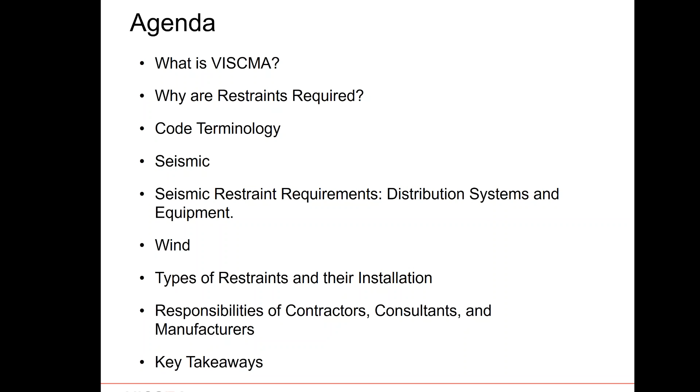So VISCMA is a collection of partners and companies to form the Vibration Isolation and Seismic Control Manufacturers Association. We were incorporated in 1999, and we're experts in the field of seismic restraint, wind restraint, vibration isolation, and noise isolation. Our purpose is to work together as a collective of professionals with a lot of knowledge and a lot of experience and expertise to be able to provide resources, interpretations, and standards, as well as best practices for the design professionals, installing contractors, and code officials in our industry, to be able to maneuver through the different documents that are necessary to understand what needs to be done for a building when it comes to vibration isolation and seismic restraints.

So to kick off our agenda today, we'll take a look at when are these restraints required. We've had a lot of communication with contractors, code officials, and specifying engineers to say, okay, I have a building, sometimes it requires seismic, sometimes it doesn't. Just to start off, we need to be speaking the same language. What are we talking about?

When we talk about restraint, we're talking about the restraints of non-structural components. In our industry, generally, these are mechanical and electrical equipment and distribution systems, usually within the HVAC world. And what we're trying to do is restrain them against forces caused by extreme events, not just earthquakes, but also winds, bomb blasts, and different things that can happen to want to move these pieces of equipment.

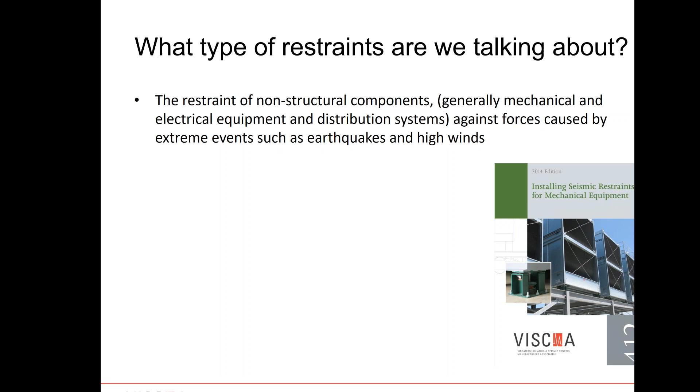The main purpose that we do this is for life safety. In different buildings, you have these pieces of equipment, and you want to make sure that they're operable during and after an event for life safety purposes. You also don't want these heavy pieces of equipment or these heavy systems falling on people, creating bodily harm.

So we have a few different codes and references that we work with. The main is the International Building Code, also known as the IBC, which references the American Society of Civil Engineers, number 7, that is updated, and the number afterwards, 02, 05, 10, is the year that it is updated.

You have government reasons, like the UFC, which is the Unified Facilities Criteria that's used for government buildings as well as military buildings, for mission-critical components, for anti-terrorism and Department of Defense. And then the last reason is due to the owner's request. Sometimes for insurance purposes, to be able to get a certain level of insurance, or to be able to protect very important data. A lot of restraints are put into data centers, for example.

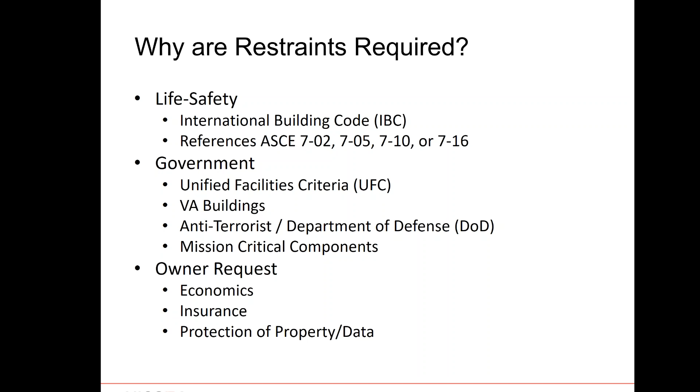Okay, let's talk a little bit about code references. So there's the code, there are standards, and then there are guidelines. An example of the code would be the International Building Code, or IBC. An example of a standard would be the American Society of Civil Engineers, or other standards that are available. And then guidelines or interpretations would be something similar to the VISCMA 412 manual that shows how to correctly install seismic restraints for mechanical components.

Translated, the IBC in the code really signifies the requirements. The standard tells you how to do it and provides you with the formulas necessary that you have to go through. And then these are always up to interpretation. And the guidelines serve as a good interpretation for the people that have to do the work on how it should be done.

A different slice or a different way to look at this is that there's a legal requirement and a non-legal requirement. The legal requirement is the code that becomes part of the building code, and then the standards that are also referenced by that code. The non-legal aspect are the standards that exist that are not referenced in the code itself, or the guidelines and the commentary that come with it. And again, an example for you to see would be the VISCMA 412 manual.

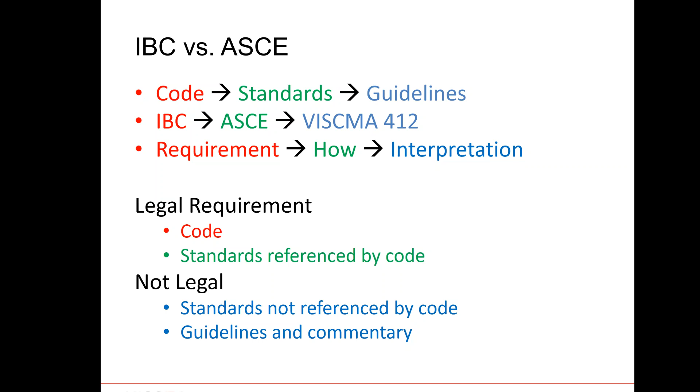Since 2003, the IBC has been referencing the ASCE, American Society of Civil Engineers, for the minimum design loads for seismic and wind. IBC is updated every 3 years. It was the amalgamation of different building codes from across the United States to create the International Building Code. And every 3 years it's updated. It's adopted by different municipalities and jurisdictions at different times. We still have people that are on IBC 2009, and we will have early adopters of IBC 2018 in early days of 2018. And there can be local amendments for each of these municipalities.

The ASCE document is updated as needed. It was updated in 2005, 2010, and 2016. And you can see that each IBC code references an ASCE 7. So in 2018, when your jurisdiction adopts that code, it will reference the newly updated ASCE 7-16. These are the critical documents necessary to have an understanding of what the requirements are for any new construction or retrofit construction in your area.

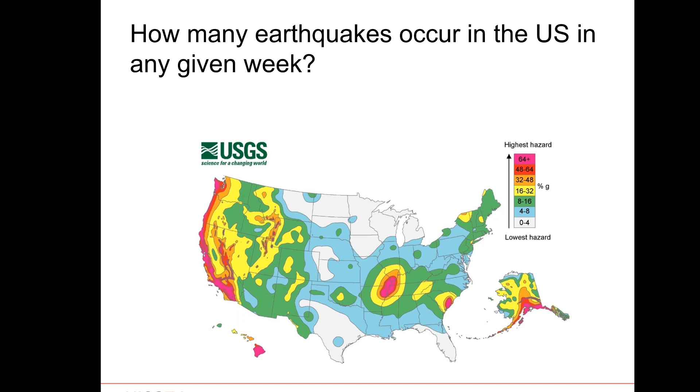Let's talk a little bit about seismic, and we'll start with a little bit of trivia. We've taken some information from the USGS website, and we've taken an average week. So if you were to think to yourself, how many earthquakes occur in the United States in any given week? I'll give you a little bit of time to think about this and come up with an answer. We ask this question when we do these presentations for different influencers. Usually the answer is 5 or 10, or maybe some people would guess that there's 20 or 30 in a given week. The answer for any average week is over 1,200 earthquakes.

And then you can see here on a map of the United States, there's a lot located in Alaska, California, up the West Coast, but it isn't only limited to those areas. You can see that in Montana and Idaho, Oklahoma, Tennessee, and usually in a given week, Hawaii, South and North Carolina would have some seismic activity as well. So this is not just something that applies only to the West Coast.

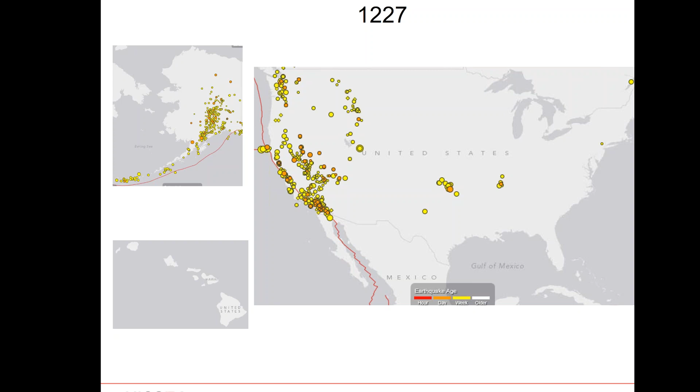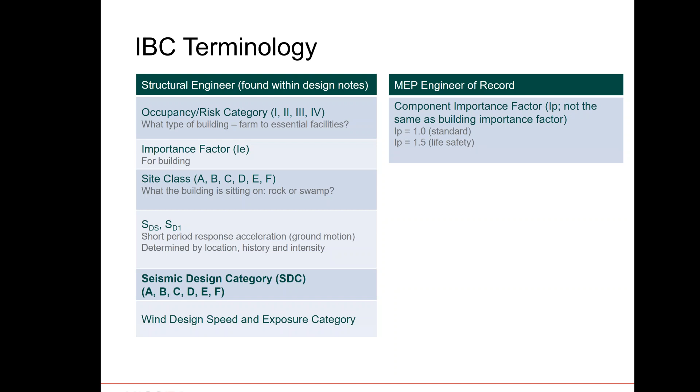So when we take a look at the seismic design category that goes from A to F, for buildings that are classified as A or B, there's no seismic design requirements for non-structural components. There are absolutely requirements for the building itself, but when it comes to restraining non-structural components, there's nothing that we need to be worried about. For buildings that have a seismic design category of C, only the systems with an I sub P of 1.5, which we will show you how to determine in a moment, require restraints. And then there are exceptions.

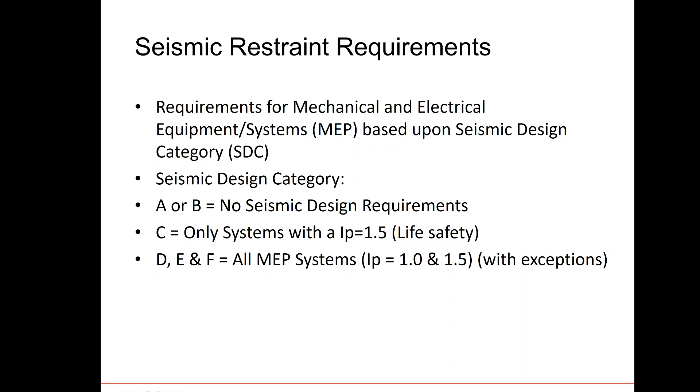For buildings that are D, E, or F, usually you'll only see C or D. E or F are more of the extreme. But for buildings that are D, E, or F, all of the MEP systems, both 1.0 and 1.5, will require restraints. However, there are some exceptions and some exemptions from this that we will cover.

Here, what we have done is we've referenced the ASCE 7-10, since that's the most commonly used version of the ASCE currently, Chapter 13, Section 13.1.3, showing MEP engineers of record how to determine the component importance factor for different pieces of equipment and different systems. And here are the 4 categories that make the I sub P 1.5. By making the I sub P 1.5, there's more likelihood that that piece of equipment will need to be restrained.

So I'll cover a couple of these. The component is required to function for life safety purposes after an earthquake, including fire protection sprinkler systems and egress stairways. Or the component conveys, supports, or otherwise contains toxic or highly toxic or explosive substances. So you get the picture, and if you reference the ASCE 7-10, Chapter 13, you will find these requirements of where you should classify a component as 1.5 versus 1.0.

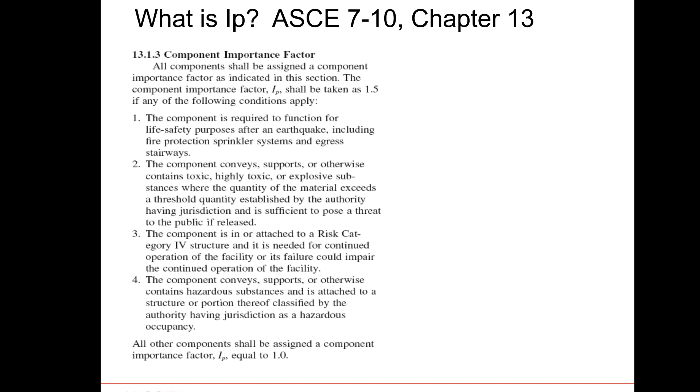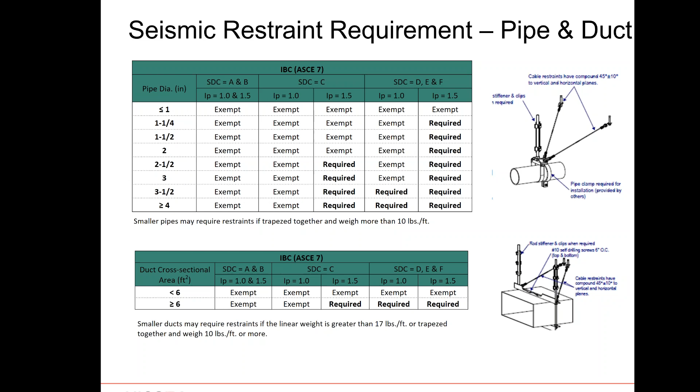Let's take a look at equipment. There's a few different exemptions based on weight for equipment. Basically anything under 20 pounds, which is not too much in the non-structural component world, then you're exempt. If it has less than 20 pounds, it's not considered to have life-threatening aspects. 75 pounds, if it's rigidly connected with no flex and has an operating weight of 75 pounds or less, and you see this with some VAV boxes, then there's an exemption.

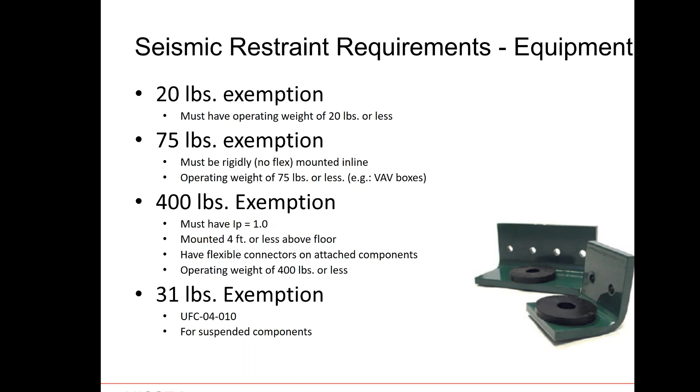And then usually for ground-mounted, floor-mounted equipment, there's a 400-pound rule, but it has a few different factors. This is only for Ips of 1.0. They have to be mounted 4 feet or less above the floor, so usually they're connected down to the ground. They have to have flex connectors on the attached components, and obviously have an operating weight of less than 400 pounds. Now, for a different code, for the UFC, there's the 31-pound exception, which basically says anything that's under 31 pounds is exempt.

Coming to an end of my part of the presentation before I pass it off to John Giuliano, we'll quickly just take a look at a couple of types of restraints. We've spoken a lot about requirements, but we haven't taken a look at what these look like. So a restraint is anything that would restrict movement in a certain direction. That's the definition of what a restraint is. And these could be cable restraints that are usually used for distributed systems and suspended equipment, rigid restraints, which would be brackets with a piece of strut or angle in between that would work as a two-way restraint for distributed systems and suspended equipment.

Steel-housed isolators, so an isolator like you see here in the middle that has a housing around it. The isolator allows small movement for vibration isolation, but under any event, the housing strength will kick in and basically stop the equipment from moving. Snubbers and brackets that maybe are put around a piece of an air handling unit or a piece of equipment to stop it from moving. And then you have different types of structural stands for ductwork, piping, and tanks, as well as anchors that would just go through the feet of plate and frame heat exchangers, different bolts and screws.

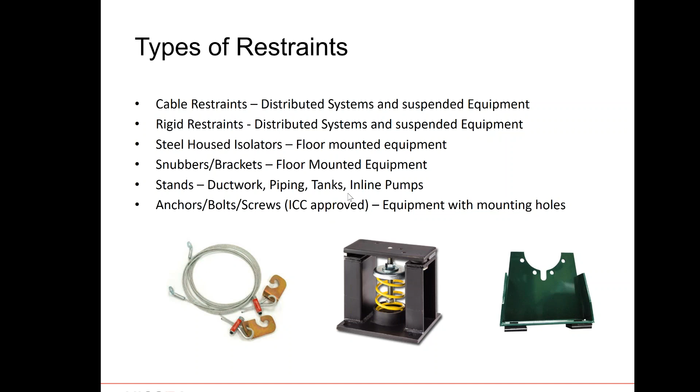This final category has to be ICC approved. You can't simply take any anchor off the shelf and install it. It has to be an ICC approved anchor, bolt, or screw to be put in with the equipment and mounting holes. So I'll just leave you with one thing with regards to the equipment and the product that you use. It must be included in the submittals and stamped by a professional engineer. For example, you can't just select something, put it on and say, okay, I put a snubber around this air handling unit. The design must be calculated so that an engineer of record can determine that the seismic restraint that is being used is sufficient to withstand the forces.

Since the forces vary from location to location, floor to floor, equipment to equipment, a calculation needs to be done to ensure that the restraint can overcome those forces. And lastly, the product should be tested as per the industry test method to ensure that the load envelope that's being provided by the manufacturer is accurate and does what it says it would do. And this is a newly established standard by ASHRAE, and it's standard 171.

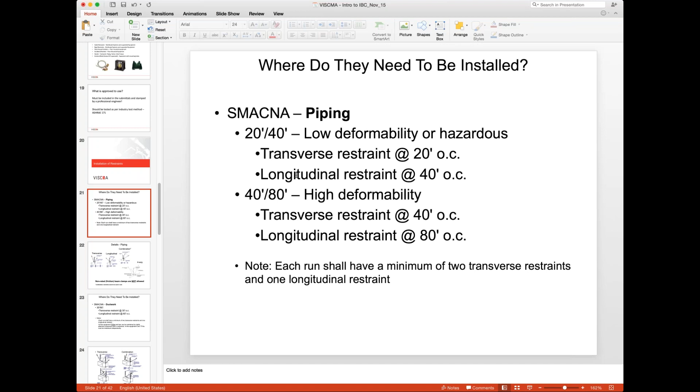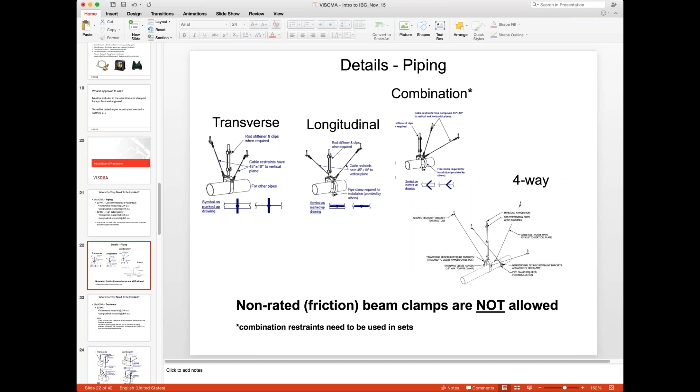Now, did that slide move along, Sammy? If you're still there. Hopefully it has.

Now, on ductwork, we use a different standard. We use a 30-60. All elements of what we had done on the piping are the same. We go through the math, determine the load, determine the required capacity of the brace that we're going to apply. And the same thing, each run requires 2 transverse restraints and 1 longitudinal. And in the code, there are standards as to what defines a run. If it's a typical bend or such, some of it may be small enough where it is not a run.

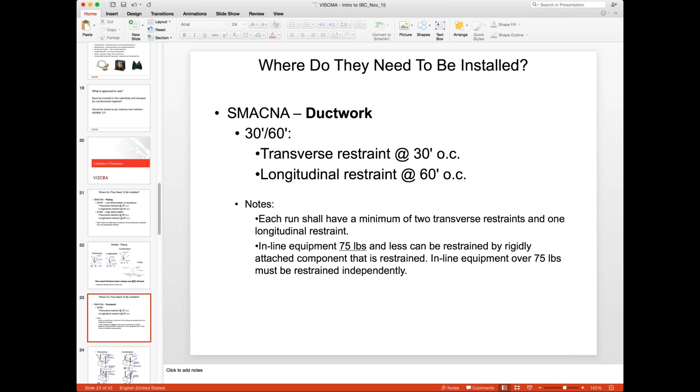And then inline equipment, 75 pounds and less, can be restrained when it's rigidly attached to the ductwork. Anything over that has to be independent. The assumption there is that for something weighing 75 pounds or less, the standard design and construction of the duct will restrain and support that 75-pound piece of equipment.

And here's the same 4 layouts as for the piping before. Rather than go individually through them, one thing I do want to point out that's important, that a lot of people don't realize, probably best seen on the lower 2 drawings: the transverse bracing doesn't technically have to span outboard of the ductwork. They can cross inboard, so they don't run into other pipes or other ductwork. You still run it at roughly the same 45 degrees off the horizontal, and you have a lot easier installation. So for the contractors out there, you may only see them on the drawing where they splay outboard, but you can go inboard if you have the room.

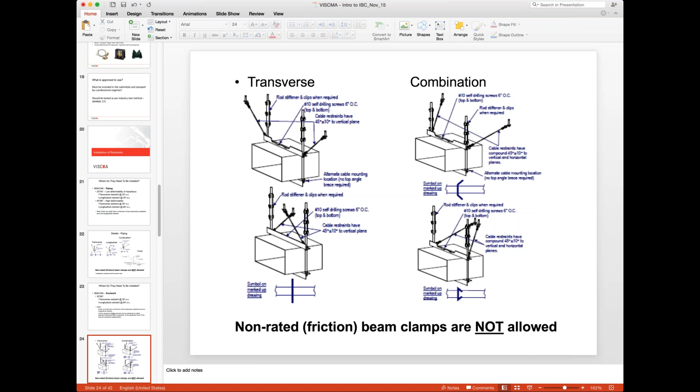Much less interference. All else has to be equal, the same. The math has to be done right. It still has to have the rod stiffeners, and the anchors, as Sammy said, need some kind of third party certification. He referenced ICC, which is generally the one out there, but there are other third party certifiers for anchors. So get the allowables from there when you do the math for that one. And there's a very important note at the bottom. Non-rated friction beam clamps are not allowed. The code is explicit that you're not allowed to use friction due to gravity as a seismic restraint.

So here's that discussion of rod stiffeners I was bringing up. In general, you're going to see rods from 3/8 to 1 1/4. Occasionally you will get higher, but that's the general 90-10 rule you're going to see on your job sites. And that table shows the maximum length before you're going to need a stiffener. So you see a 1/2-inch rod, anything over 2 feet is going to require stiffening, because under any compression load, it's going to buckle. It almost buckles under its own weight when you stand it up vertically.

And then when you have it with an isolator, that sketch shows that you are now technically using that hanger box as part of your compression system to get that compression load back up to the building. And as such, you're going to need to install, and it's typically on all of the manufacturer's submittal drawings, a stop washer with a nut underneath the box, so when you push on the rod, it doesn't just go through the box. This way you can carry your compression load, and those boxes are typically designed for that, since they're also designed, at least on the tension side, for a large safety factor over their standard spring capacity.

And the notes on that table are also important. A minimum 2 rod stiffener clamps. It's rare, but occasionally you'll see just one piece of angle bolted to the side of that rod that doesn't shorten the effective length of the rod. The purpose of those stiffening clamps and attachments is to effectively shorten the unsupported length of the rod.

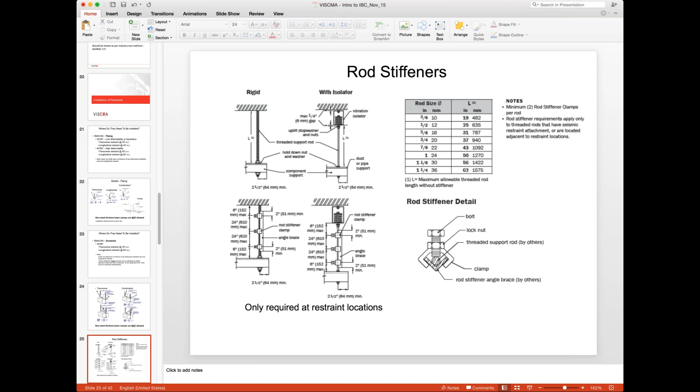Now, where do they need to be installed? They being seismic anchorage and such. Right now we've been talking mainly about overhead suspended equipment, but the same process of going through the calculations, going through the requirements, going through the seismic design category to determine what needs to be anchored. Then now you've determined that this equipment is floor mounted and needs to be anchored. You have to go through the calculation to determine the load on each anchor, and then use the appropriately rated anchors.

And Sammy put together this PowerPoint, so he did all the heavy lifting for us. Thank you, Sammy, again.

And he pointed out 4 of the manufacturers that are typically out there. We know there are others, and this does not say that these are the only ones to be used, but we do know there are rated allowables out there. They've done testing, and most contractors easily have access to these manufacturers. But the math still needs to be done. Someone has to go through the numbers. An engineer has to do his calculations, put a stamp on it, that he followed all the code requirements for amplifying the loads or putting safety factors onto the loads when you're attaching this equipment to concrete.

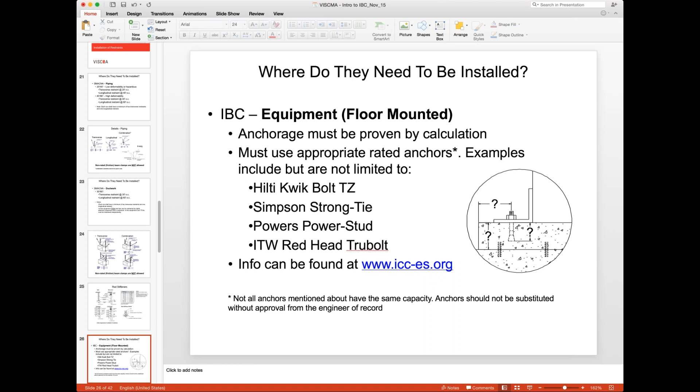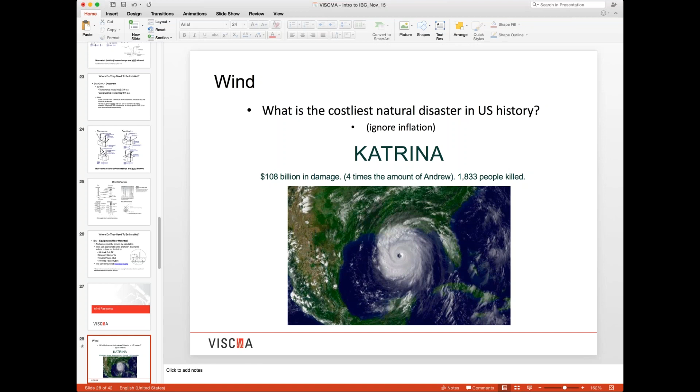Wind restraints. This is a good year for this one. We probably haven't updated this. We've got to double check, but as Sammy said, there was some trivia. If you ask yourself what was the costliest natural disaster in U.S. history, it was Hurricane Katrina. Obviously more than just wind damage, but there was $108 billion in damage, and 1,833 people, way too many, were killed because of it. And this year, between Texas and Puerto Rico and other locations, there's been wind damage all over the place. And one of the issues we know is the attachments, which we'll get to.

But other than seismic, ASCE 7 puts out maps for wind. And as luck would have it in our country, most of the regions that are high in wind are low in seismic. So regardless of where you are, you're going to have some kind of requirement that's going to require restraints, analysis, and such to keep mechanical equipment attached to the building structure.

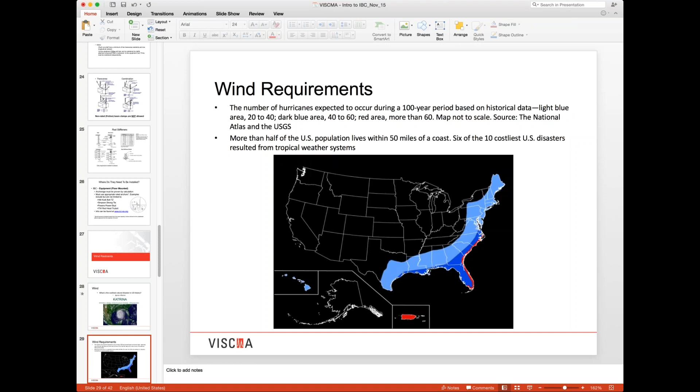There was one way to calculate the loads based upon wind speeds. There was a wind factor of 1.6 in the load combinations in these building codes. So it's very important when you're doing the analysis for wind that you're looking at the right map relative to the right code that you're using.

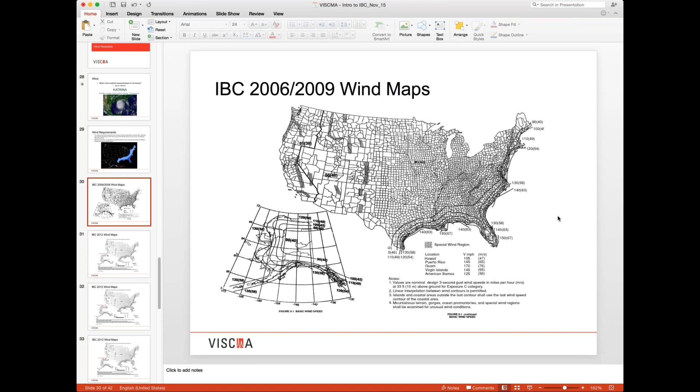And so if you're using a 2012 map, you need to use the 2012 load combination factor to get the correct pressures. If you're using the 2006, 2009, the wind speeds are a little bit lower, but you have a higher amplification. So you need to be very sure of your risk category and the code you're using.

Now, in general, though, through the years, the wind code equation stayed roughly the same. In ASCE 7-05, it was in chapter 6. I'll get there later. In 7-10 and 7-16, it moved to other chapters. And for mechanical equipment, which we're discussing, you'll find all of the details in chapter 29 for ASCE 7-10 and 7-16.

But effectively, from your wind speed, you have to determine a pressure. There's gust effect and force coefficient factors that need to be put in. Though in general, for the equipment we're dealing with, we're not designing buildings. We're talking about mechanical equipment, rooftop equipment, rooftop structures.

What's highlighted in yellow is there's a 1.9 factor. And in the newer codes, which generally everybody's been using, that GCf combination becomes a 1.9. And then that's multiplied by the frontal area of the equipment, which is the area of the equipment normal to the wind, which will be receiving the load.

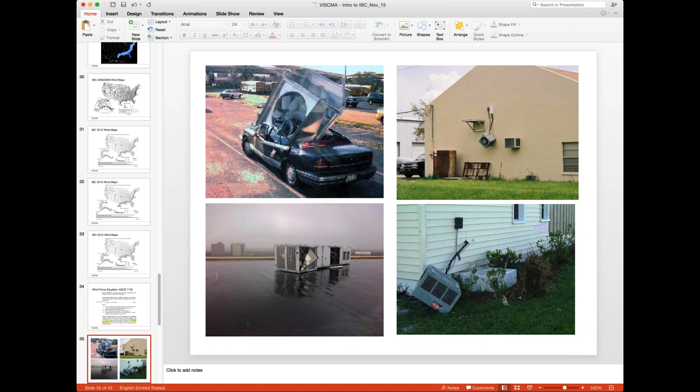Now, here are some examples of what happens when it's done wrong. I don't remember where some of these are from, but I do know the one on the lower left was from Sandy. The other bad designs, I don't know exactly which hurricane or windstorms they came from, but needless to say, they were done wrong. The equipment itself wasn't attached properly to the building structure. Very similar to the suspended equipment and the floor-mounted equipment, roof-mounted equipment needs to be attached to the building structure using the equations calculated here to determine the type of restraint or anchorage to the building.

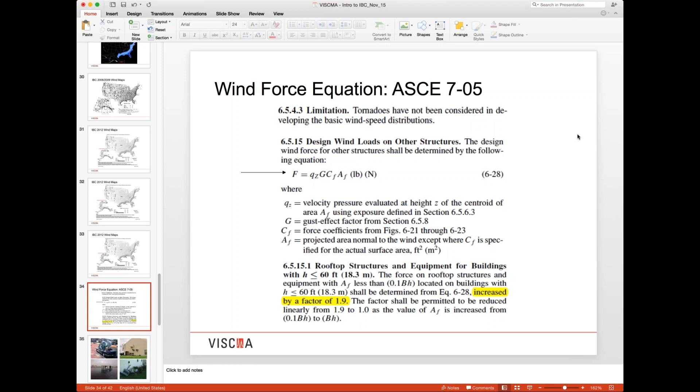Now we have a section here on responsibilities. Sammy mentioned some of the more important ones earlier on. The most important, at least from our aspect, is the Ip of the equipment, which comes from the MEP. And as he mentioned, and I'm sure somebody will ask, there's only two values of Ip available. It has a short menu. You get 1.0 or 1.5. And that determines exemptions or whether or not the equipment needs to be anchored properly.

Now, the contractors, it's their responsibility to install the restraint as per the manufacturer's instructions. The manufacturer will be submitting his equipment with the calculations showing that this is the means of doing it. And the engineer has reviewed it, so by the time it gets to the contractor, that is what needs to be done. And it is his responsibility to ask questions. No engineer has put out the perfect drawing ever, and as an engineer, I'll admit to that. So there will be something missing. There will be something unclear, and it's the responsibility of that contractor to ask that question. It's always safer to ask the question than do it wrong and pay for it afterwards.

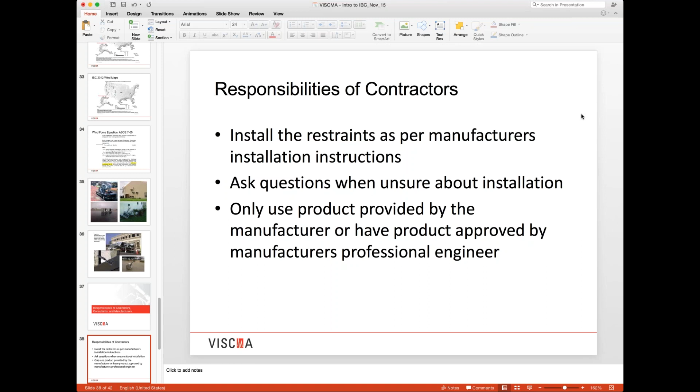And it's his responsibility to use the product provided or specified and approved by the engineer. Going to Home Depot is not the solution. If the manufacturer provided it, there's a reason they're providing it. It was tested, it was approved with their equipment.

The consultants, they get in obviously on the job a lot earlier, and it's their responsibility to write a project-specific specification. And they have to reference explicitly which code is the design code for that particular building. And every state varies, as we know, whether it was submittal date for permit or approval date or whatever it may be. So as an MEP installing contractor or someone supplying equipment, we don't know when all the paperwork started on the project. So the consultant has to put it somewhere clearly, which is the building code of the basis of design.

They need to create the schedule or specify the Ip, as we were talking about. Without that, as engineers, we have to make worst case assumptions. A standard of care has to be provided. We have to assume worst case if we're not told otherwise. So it gets very expensive for the building owner if that Ip is not properly specified or if it's not specified at all.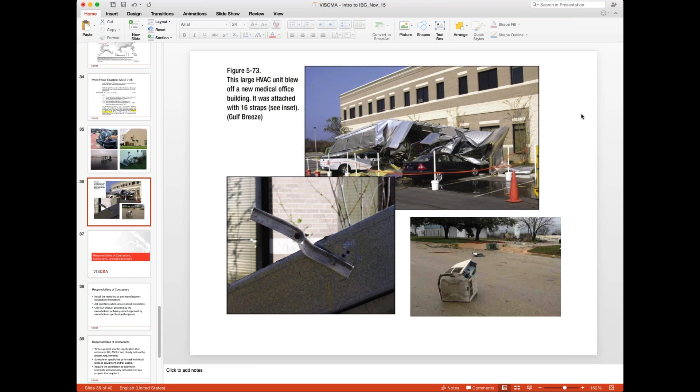And the consultant also has to require the contractor to submit the restraints and calculations for all projects that require it for approval, so that someone else has reviewed it, that the building engineer, whoever, structural engineer, or their consultants have looked at it and also have been at least alerted of the loads that this equipment is going to apply to their structure. Many times, especially we see some of these pictures, big pieces of equipment, very often the building engineer was unaware of the level of load that his building will see from that wind. So by submitting all of that information back up the food chain, everyone will be aware of the loads that will be applied to that building.

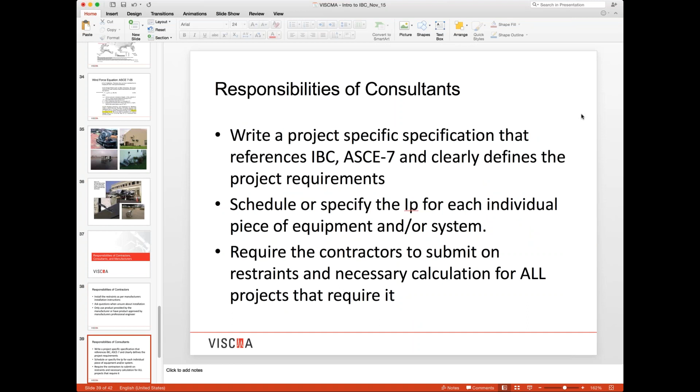Now the manufacturers, this actually falls under two types of manufacturers. The manufacturer of the equipment may not always be the manufacturer of the restraint, but we all have the same responsibility. The products need to be tested in some way, shape, or form to ensure and prove that the rated loads that are being put out there have some basis. The old days of just throwing a calculation and saying this is good for 1,000 pounds, engineers today are expecting more and demand more. And so the responsibility is to test your product to make sure it's compliant. Also, if it's equipment with an Ip in critical facilities and essential facilities, the building code now requires the equipment to be tested anyway to show functionality after the event.

We, as the manufacturers, and as VISCMA, we are manufacturers, we are required to follow the code for all calculations. And the codes are very explicitly spelled out on how to do the math, and we have to follow them explicitly and put our PE stamp on those calculations. Then we are also required to give instructions to make them as clear as possible for the contractor so he doesn't make a mistake. And like I say, occasionally we will leave something out, and it's incumbent upon him to question us and make sure he's got it right, and we have provided as much detail as possible so it's not installed wrong.

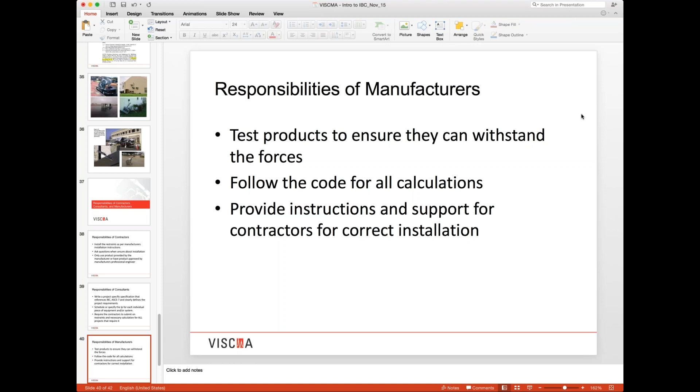Now, as Sammy mentioned, VISCMA, we've been around since 1999. I'm actually a founding member, been around it since 1999. We do provide a lot of information in terms of questions and answers. There's a FAQ page. We've produced all kinds of calculation documents, installation documents, and other documents, opinion papers relative to the code, and it all can be found at VISCMA.com. And as you see, that's the website.